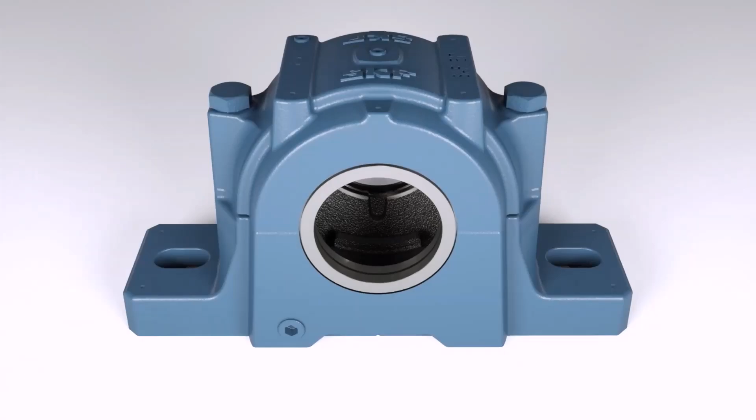So up to here we finished this model with the bolt hole. Now we are going to create an extrude here. I'm going to create a sketch on this plane, but before that make sure you have activated the top level, because this extrude cut we are going to do up to here. So if you see, we have a cut over here, so this we are going to make. Now I'm going to create a sketch.

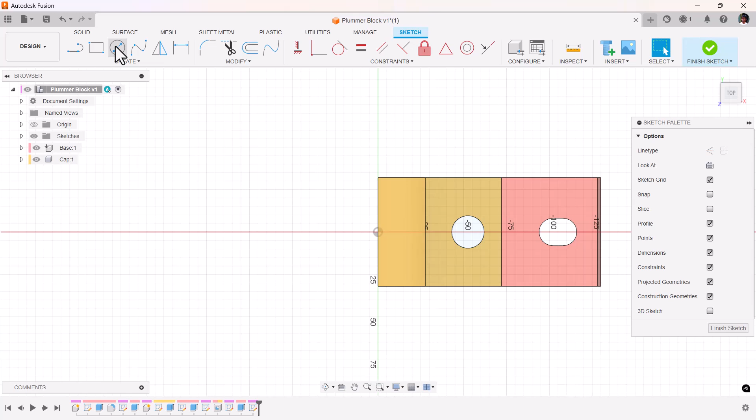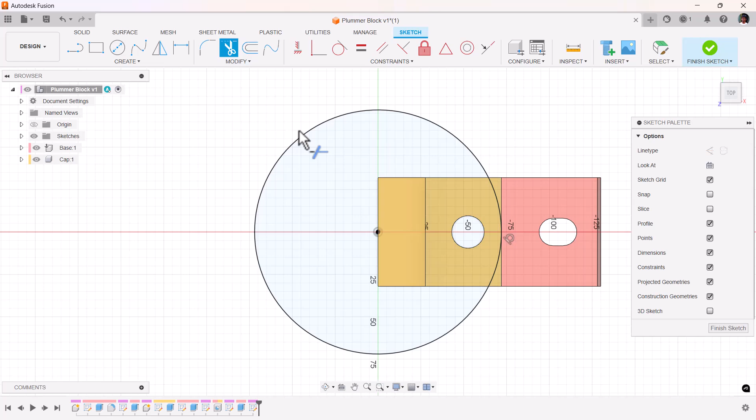So the radius of the curve is 72. I'm going to create a circle, center as the origin, and select this point. Now I want only this arc, so I would like to trim it. Press T on the keyboard or select modify, and here we have trim. Select the extra entity that you want to trim.

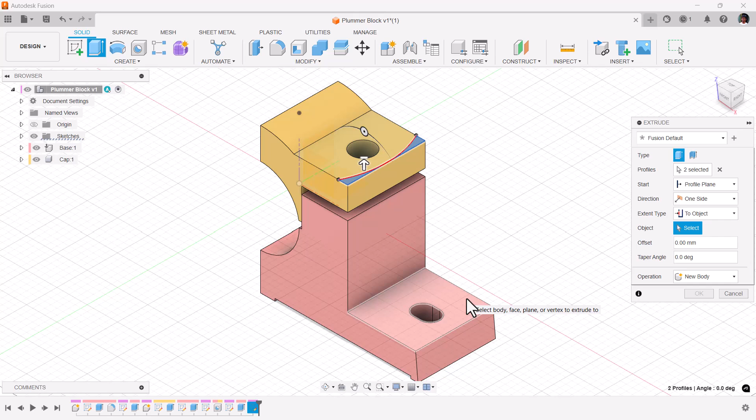I would like to switch to home view. Press E on the keyboard for extrude. I would like to select these two profiles, and here in the extent type, to object, and pick this bottom face and make sure the preview looks good. Then you can say OK.

Now just apply the fillet over here. F on the keyboard, select the edge, let the fillet radius be 5 mm.

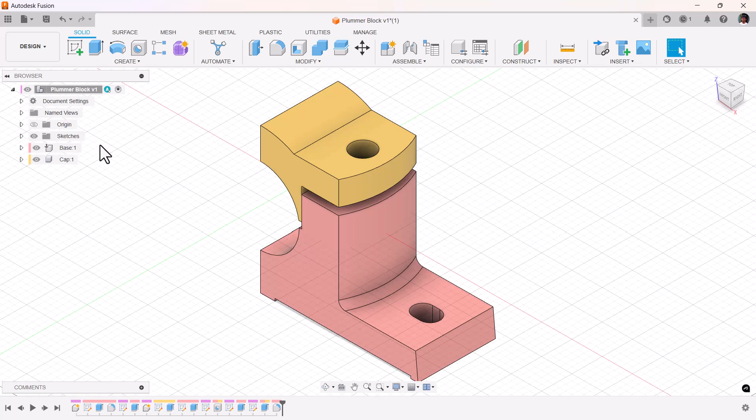And say OK. Now let's mirror these bodies, but before that there are two methods to mirror them. The one is directly activating the top level and doing the mirror, which will result in additional components. So thus, to avoid those, I would like to activate each component.

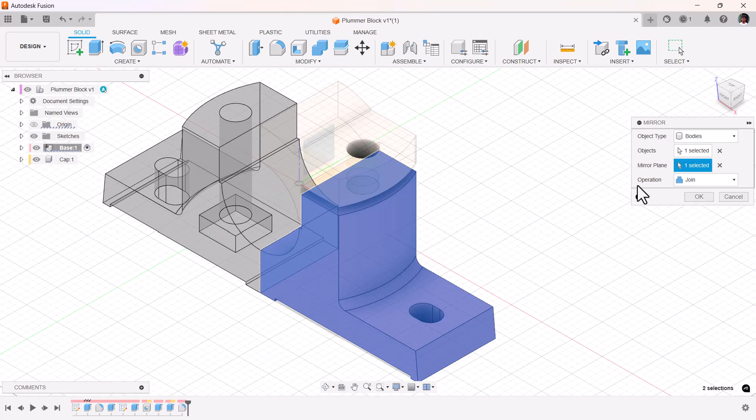First base, under create, mirror, and make sure here the object type is bodies, and choose the body. And the mirror plane, you can select YZ. You can long press and pick the correct plane, or you can orient the view cube and pick the correct plane. So now make sure the preview looks good, and operation here, make sure it is joined. Then you can say OK.

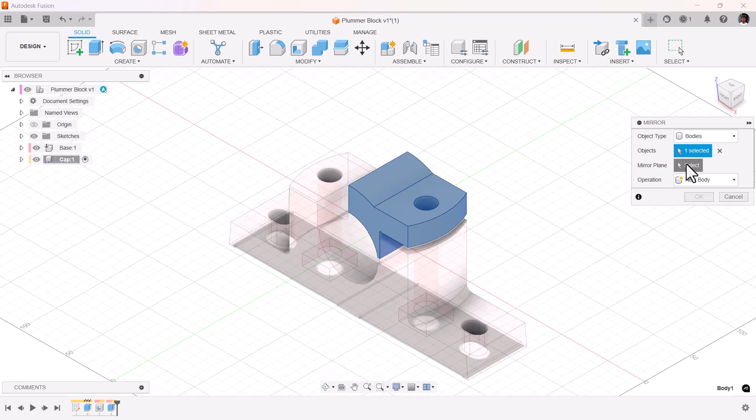Again, activate the cap, repeat the mirror. I would like to select this body, and the mirror plane be this plane. So make sure you are selecting the correct plane. Say OK.

And you can see the preview by activating the top level. So now it looks good.

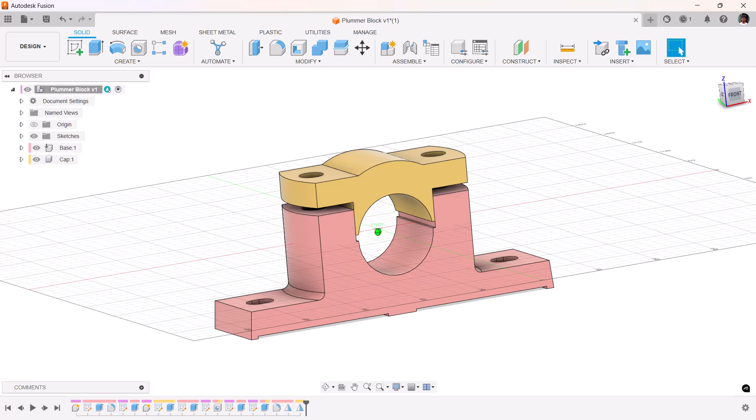So one thing we forgot is filleting this edge. So let's apply that fillet. I would like to edit my older fillet, this one. In this I would like to include that fillet. So in that way, whatever the mirror you have created will be duplicated. If you create a fillet here, this won't get mirrored. You have to do the mirror again. So thus I would like to edit this fillet. Edit feature.

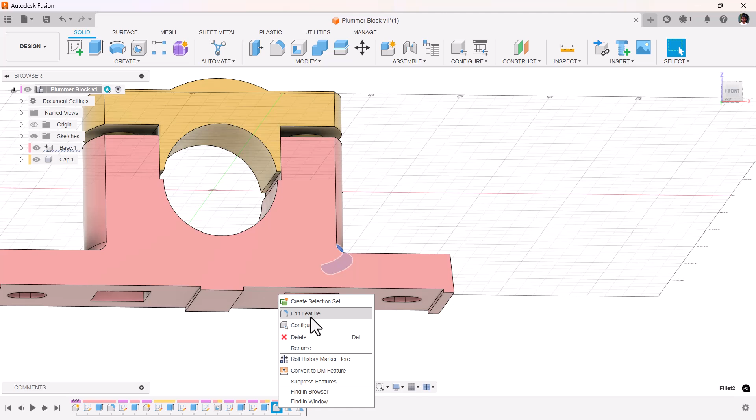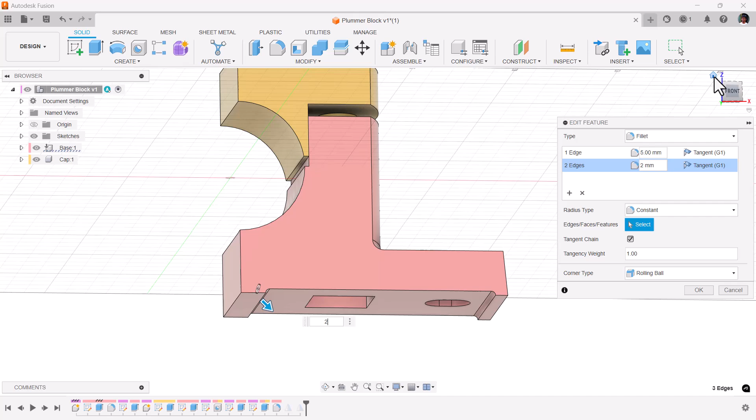Now here already there is one fillet for this, but I would like to add one more selection set by clicking on the plus icon. Now I can pick the edges, this and this. Carefully pick the edge. Let the fillet radius be 2 mm. This does not affect this, so you can create as many as you want, but I encourage you to create 2 or more groups, because in that way it might be easier for you to locate that particular fillet.

Say OK. Now if you observe, that automatically got mirrored because the fillet is created before the mirror.

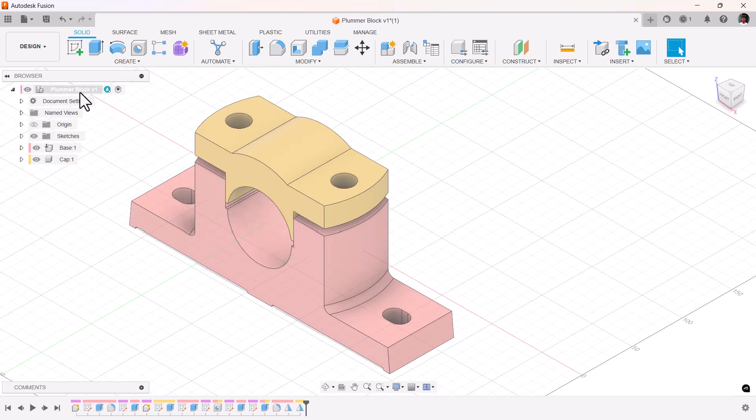Now let's create the bearing brasses. I'm going to right click on the browser, say new component, rename it as bearing brasses. Make sure it is internal. You can activate it, say OK.

Now what we are trying to create is this. If you observe here, this is our bearing brass, top and bottom two we are having. But first we will create one, then we will split it to make it two components. So if you observe here, this is the center point and the dia is 60 mm. From here to here the length is 64, and this length is 24 total. So 64 minus 24, that is 40. So from here to here it is 40.

I would like to create half of it first, then using mirror I'll duplicate it. So let me create a circle of 60, then I'll extrude it to 40. Okay, that is 20, half of that. I'm going to create a sketch.

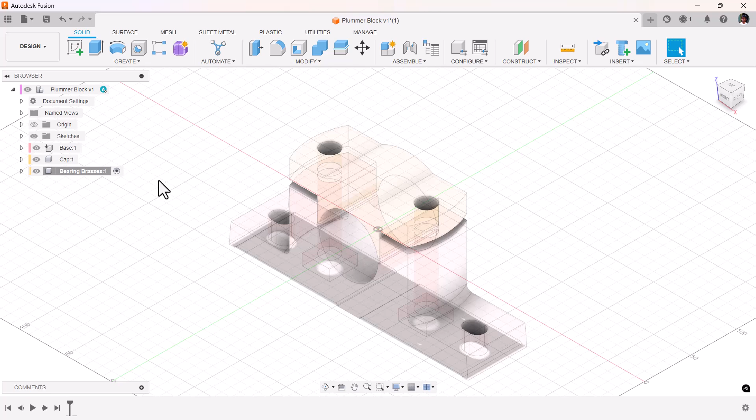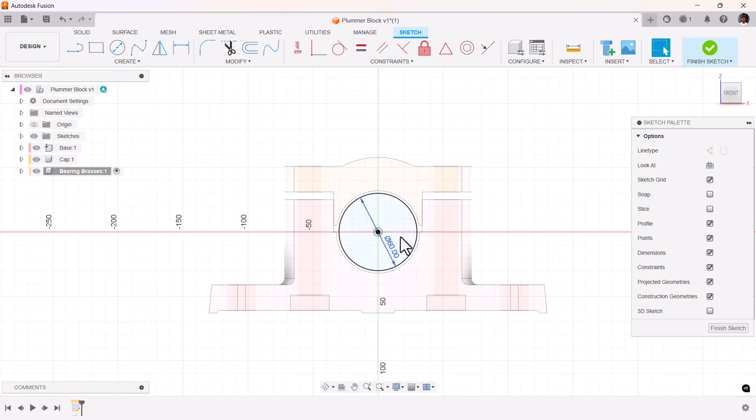Make sure you have activated bearing brasses. Create a sketch. You can hold your left mouse button to get these options. Then you pick ZX or XZ. Circle again. Origin as center. Draw a circle of 60 mm dia. Enter. Select the circle. Extrude. You can extrude any direction, no problem. So I would like to extrude in this direction, that is -20.

Enter. Again I would like to create a sketch. So this time the circle dia be here, if you see 64. So make sure you create 64 dia. Enter. And select this face and this face.

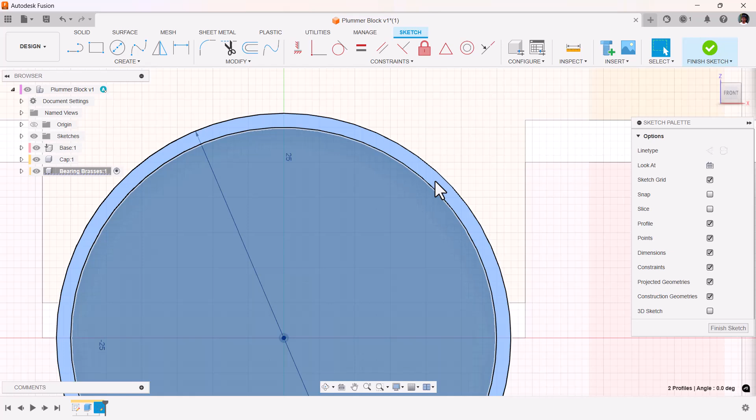You can press E for extrude. Home view, to see the preview. Let the length be 12 mm. So here the dimension is, so this extrude, that is 12. So make sure it is joined. And say OK.

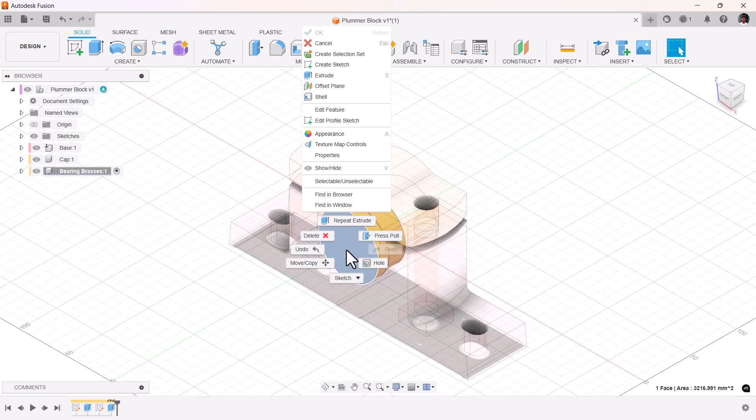Again I'm going to right click, create a sketch. So circle, right? You can use this marking menu to quickly create a sketch for basic commands. And the dia is, sorry, the dia is 76 now.

So enter 76. Now you can select these two profiles holding Ctrl on the keyboard. Press E on the keyboard, so the extrude length be 10 mm, and make sure it is joined. Say OK.

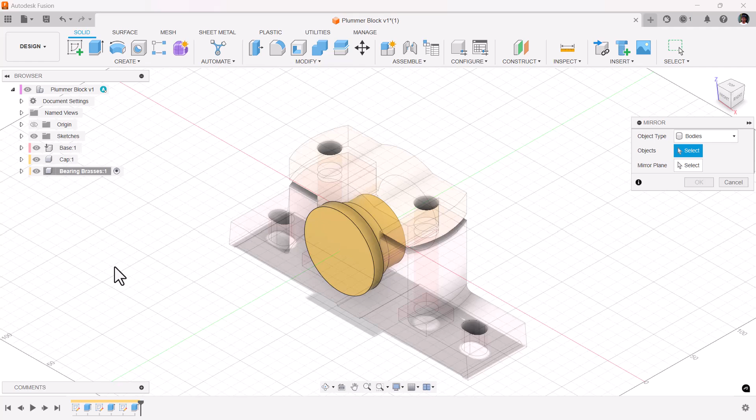So we got this half part. Now let's use mirror under create. Select the body and mirror plane B. You can select this circle part, or you can select the plane. Let me tilt it, and I would like to select this face, make sure it is joined, and say OK.

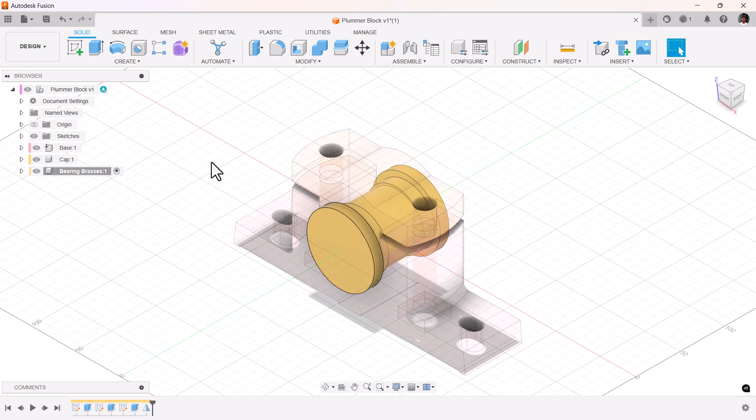Yes, so let's provide a hole now. Press H on the keyboard, or you can select the hole here. To place a hole, you can place it anywhere on the cylinder. Don't worry if you do not get the diameter right.

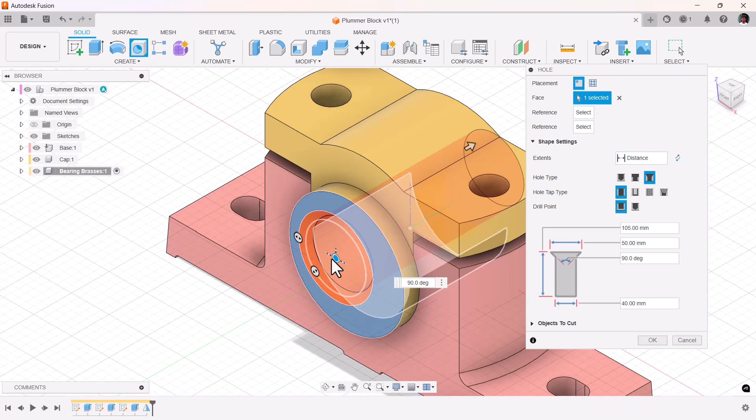I'm going to tell you the options you need. First thing you have to do is locate the center. Since it is a cylindrical part, it has a center. When you try to move by holding the center point of the hole, it will show you the center of that particular related cylindrical body.

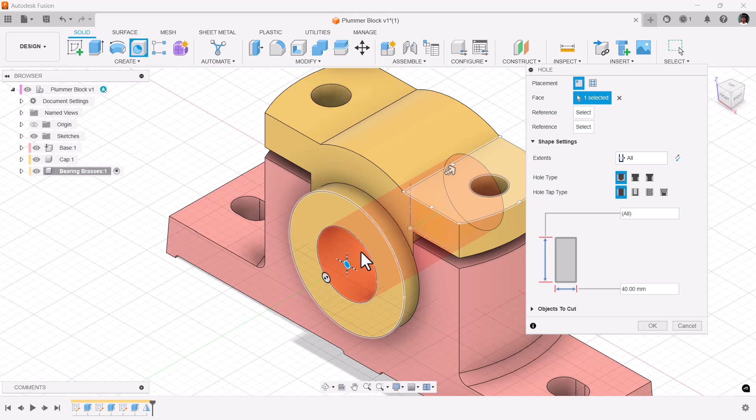So when you come close to it, it will snap. Now after it got snapped, you can provide the type of hole. Currently it is a simple hole, make sure it is simple here also. Drill point not required, and extents to all, because we want the hole to pass all the way from here to here, and the diameter be 50 mm. You can say okay to accept the hole.

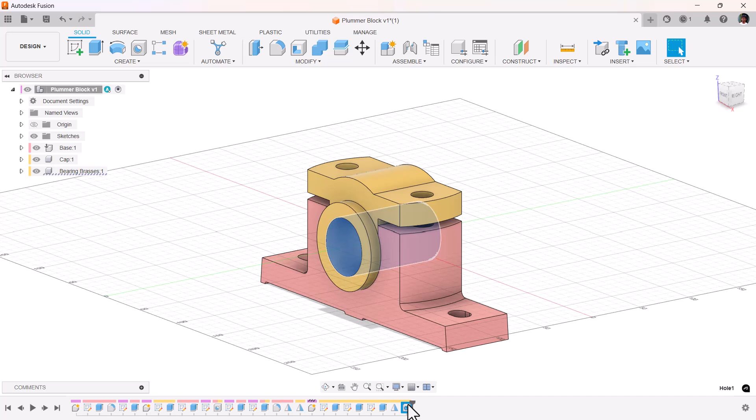Activate the top level and check the preview to make sure it looks good. Yes, one thing here is it's not extruding all the way. Let me troubleshoot it. If I say okay, yeah, now it got okay. So sometimes it might happen, just rebuild it or redo the operation again.

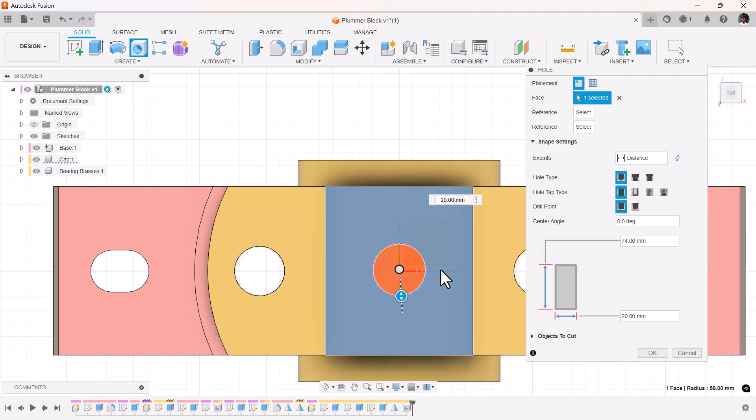Now let's provide a top hole over here. Again use hole, and I would like to select this point. As soon as I selected that point, if I switch to home view, I have to locate the hole center. You can drag it and place the hole accurately at the center, but this is not an accurate method. See, when you are trying to locate the hole, you are unable to put it correctly.

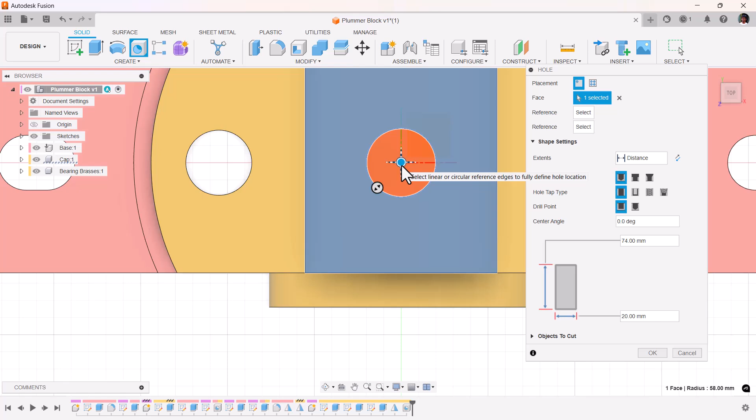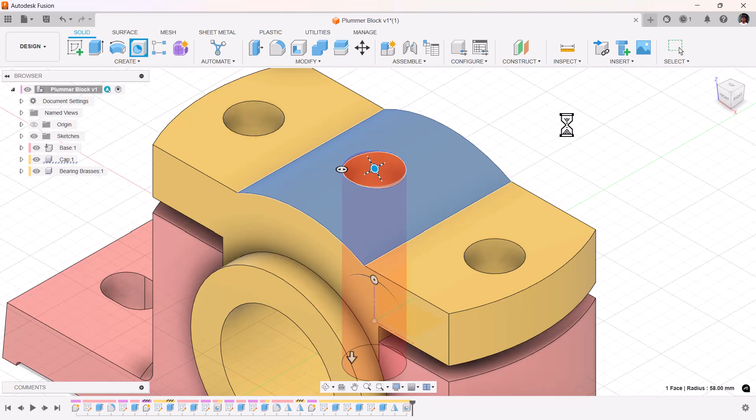So if you do not want the circle to be accurate, you can go ahead and accept this. But if you want the hole to be accurately positioned, you have to use a different method. I would like to cancel this hole, then construct a plane.

You can select tangent plane, and I would like to select this surface. As soon as I pick this surface, I got a 0 degree plane tangent to that surface. Now you can adjust this angle to tilt the plane along the surface, but in this case I want 0 degrees. I would like to say okay.

Now I would like to create a sketch on this plane.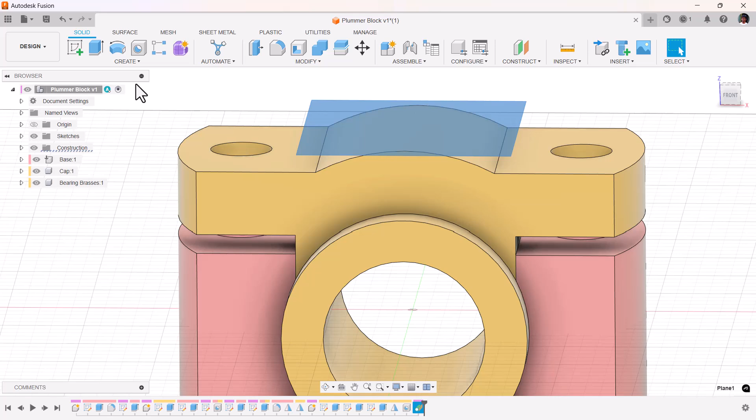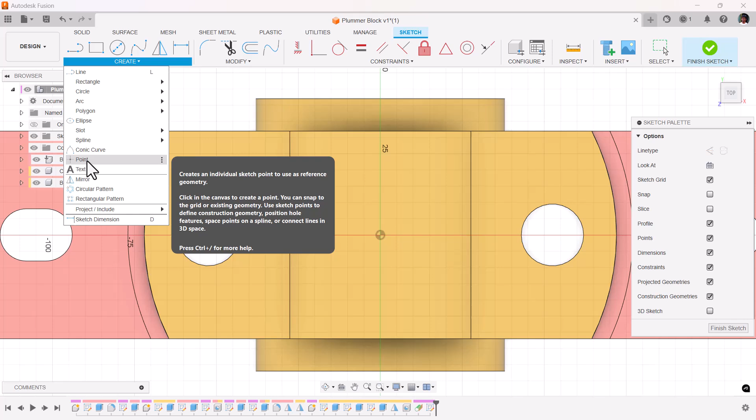And I would like to put a point at the center. Then finish the sketch, home view. Now you can use the hole, select the center point that you have created, and adjust the diameter.

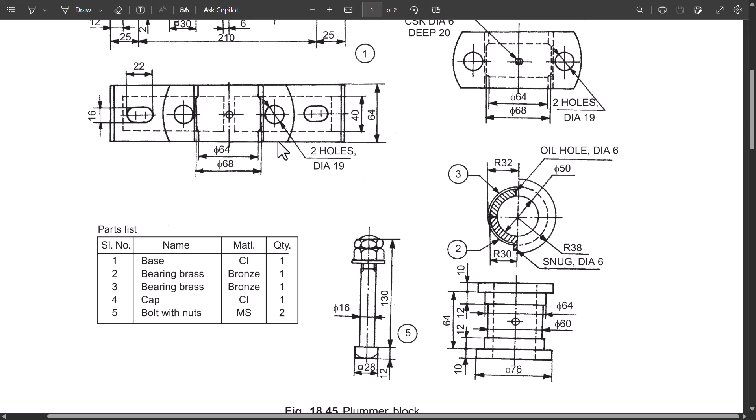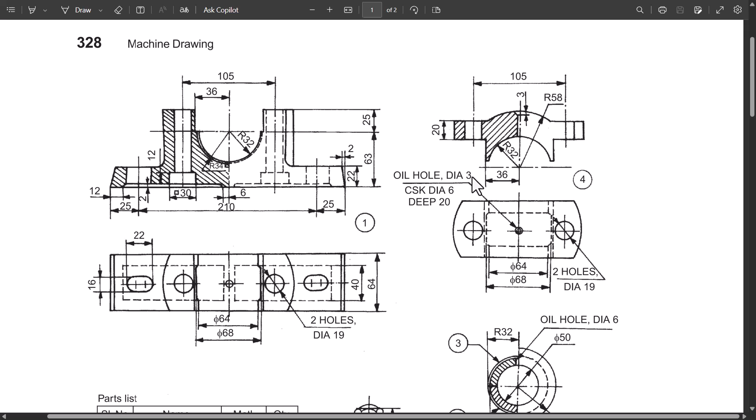Now see, if you see the drawing, here we got a hole, and the dimensions are: diameter 3, deep is 20, and the countersunk diameter is 6. Actually the hole diameter is 3. Now let's define those dimensions.

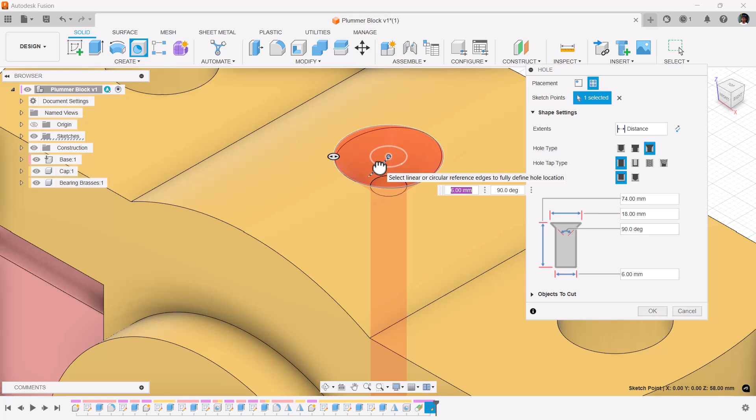So here in the hole type, switch to countersink, and you can use these handles to give the dimension. So the diameter be 3 mm and countersunk diameter be 6 mm.

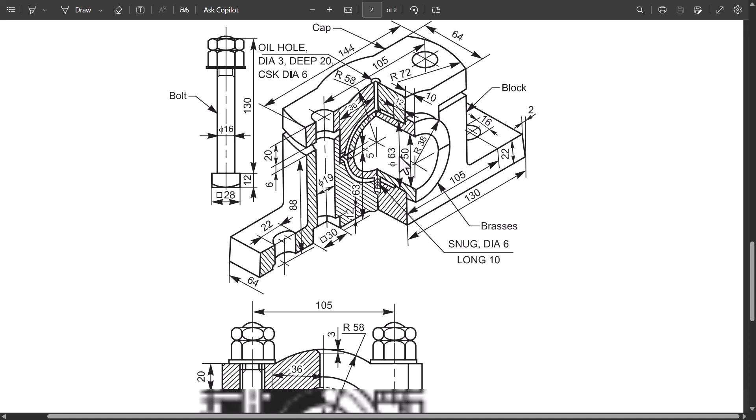The depth he said is 20, but if you check the hole, it is passing all the way from top up to here, so it is creating the hole for the bearing brasses also. Here also you can see the hole. I would like to continue that hole all the way to the bottom, so make sure it is symmetrical and everything seems good, and I would like to drop it here.

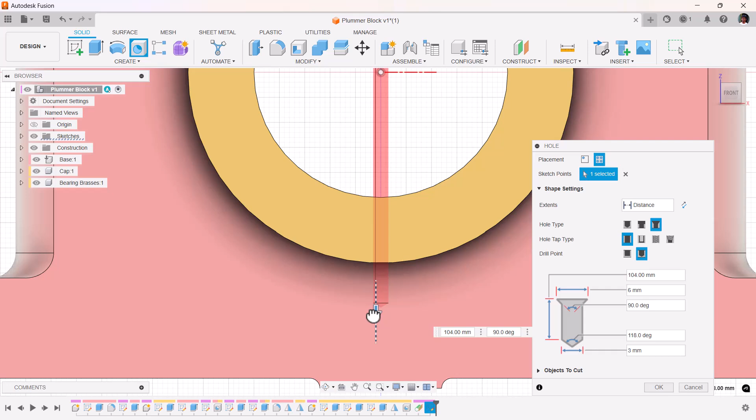You can create an angle if you want. This dimension is not given from bearing brasses to the bottom, so I would like to keep it 104. No issue, and say okay.

Now if you go to home view, you got that hole created, and make sure the hole is created for all the components. Yes, even if you hide bearing brasses, your hole is created for the base also.

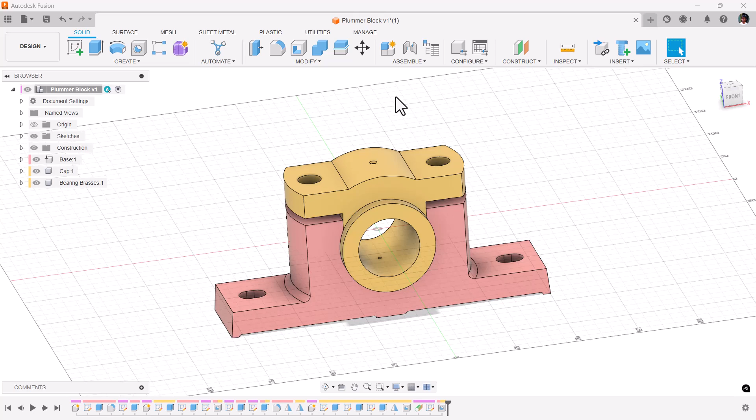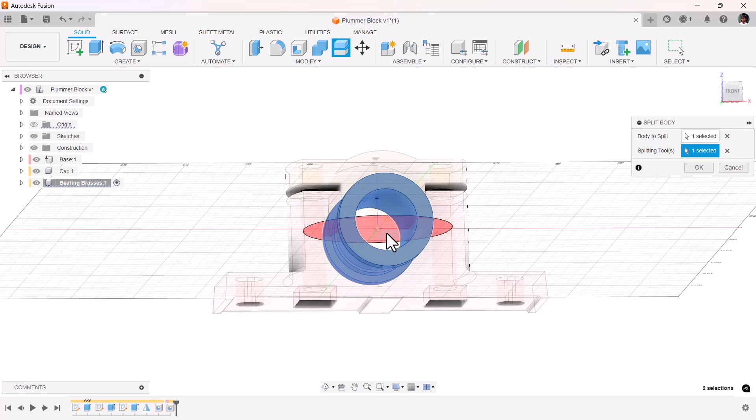So one last step for this video is let's split the bearing brass. I would like to activate the component, split the body, select the bearing brass, and the splitting tool be here. You can pick this plane, make sure you pick the XY plane, and if you say okay, now we got two bodies. You can activate the top level, and if you expand bearing brasses, in the bodies we have bottom and top.

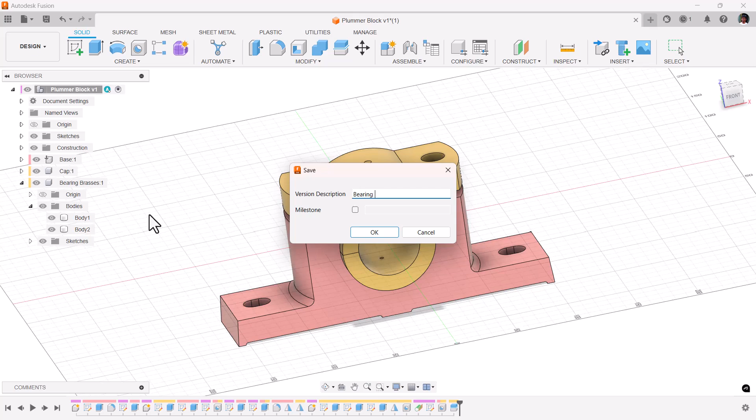Now it's a good point to save your design, adding a comment so that it becomes easier for you to identify the versions.